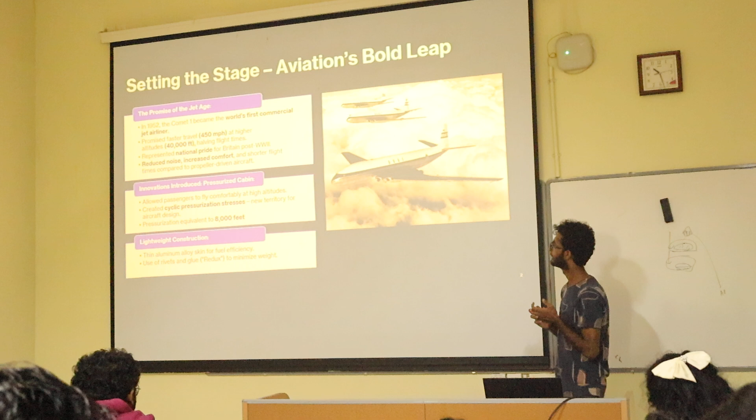So in 1952, the Comet 1 came into service. It was the first commercial jet airliner. It was promised to travel faster than previous aircraft at a height of 40,000 feet, avoiding messy weather and giving passengers a comfortable travel experience with less noise. Its design attracted passengers with a modern, sleek look.

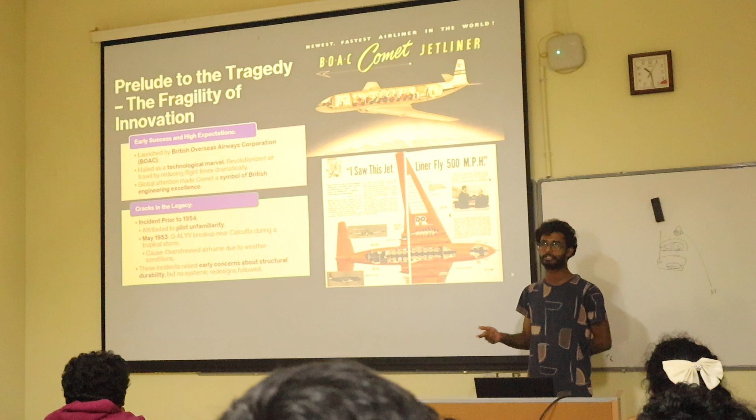Then in May 1953, another incident took place in Calcutta, which was due to weather conditions. This incident raised early concerns about the structure and durability of the aircraft.

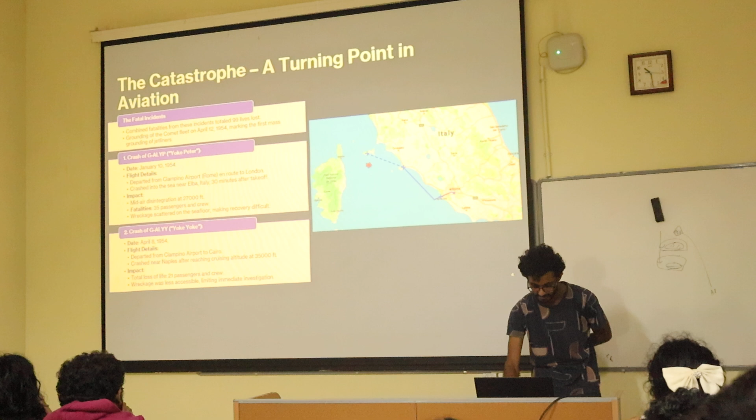Then another incident took place on January 10, 1954. The aircraft launched from Rome to London and crashed after 20 minutes of takeoff.

Then on April 8, 1954, another incident took place near the Mediterranean Sea at a height of 35,000 feet. All the incidents together resulted in a loss of 99 lives.

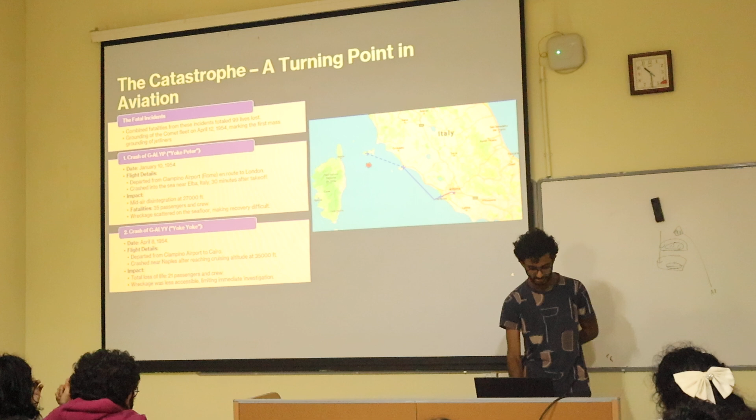These were the two incidents that people really cared about.

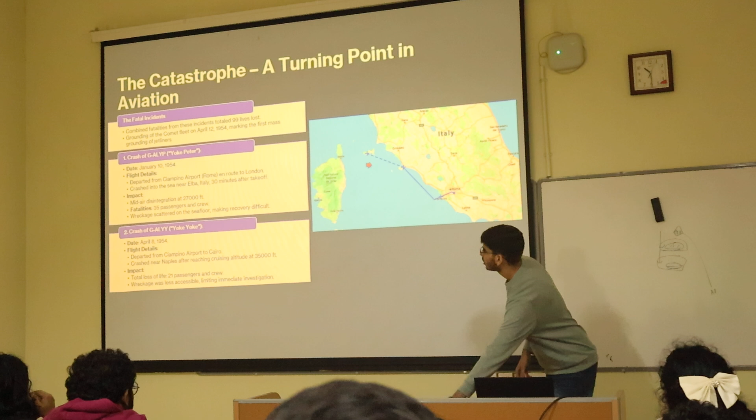There were many similarities between both incidents. After the first incident, the British government asked the Royal Aircraft Establishment to solve the mystery behind the crash. When they looked at the wreckage area after the crash, they found that it had spread over a very wide area.

This led to the conclusion that the plane had burst mid-air and had not crashed into the ocean intact. They concluded the plane must have burst mid-air, and they designed an experiment to test this.

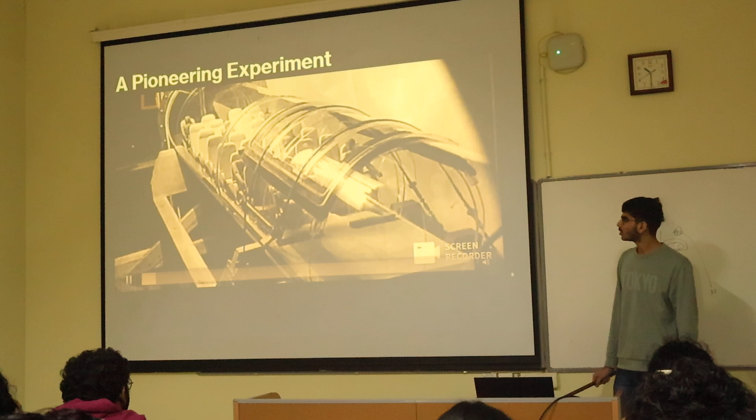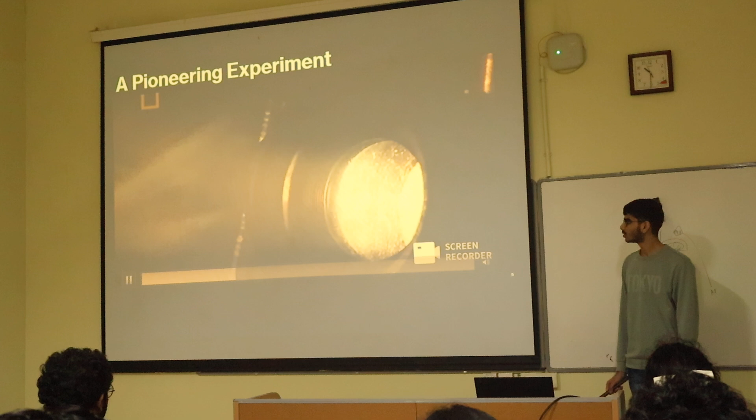The team built a perspex model of the fuselage, 1/10 the actual size. The cabin included 28 major seats. The model was housed inside a pressure chamber, where the pressure in the fuselage was increased to 8.25 pounds, equivalent to flying at 12,000 meters. The team then deliberately ruptured the model.

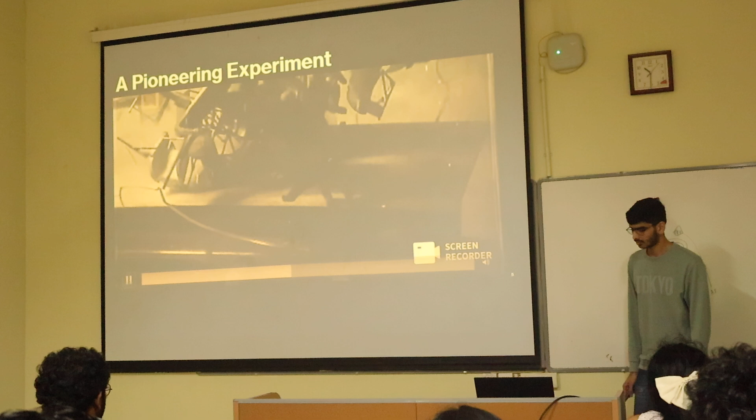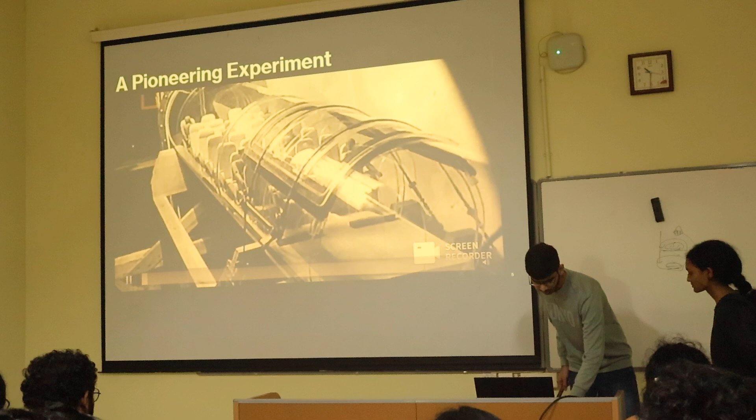The team built a perspex model of the fuselage, 1/10 the actual size. After testing, they found that the plane had exploded mid-air, and these were the conclusions they came to.

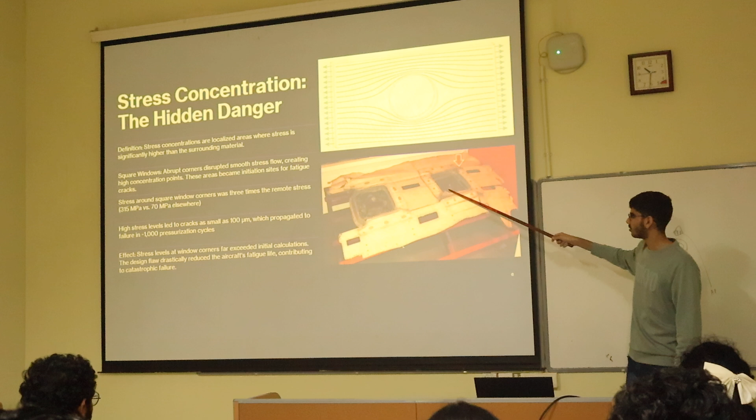The first fatal flaw was stress concentration. Because of the square windows in the de Havilland Comet aircraft, there was stress concentration around the cracks near the edges of the windows. If the windows were circular, the flow of stress would be quite uniform, but the square windows caused stress to concentrate, leading to more cracks and more fatigue.

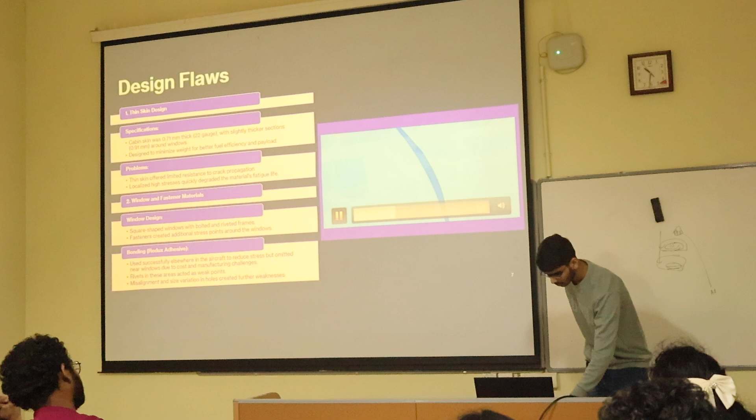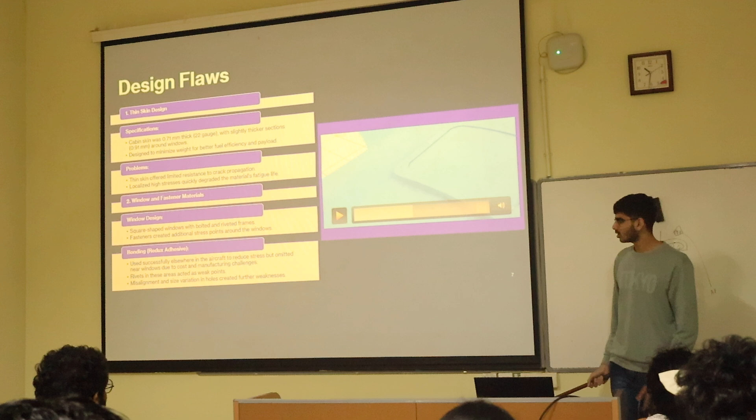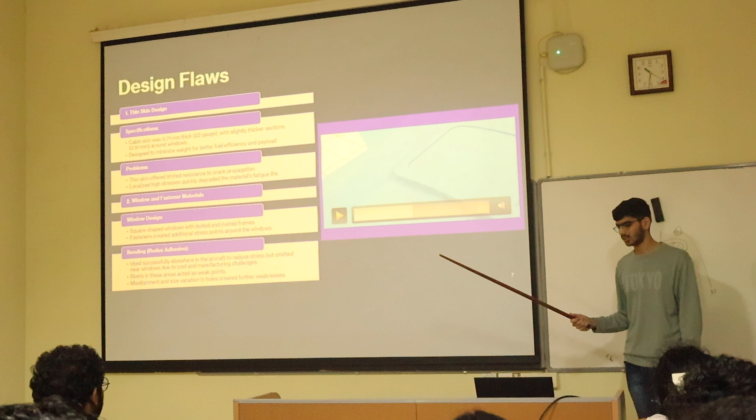There were some more design flaws in the aircraft. The first was the thin aluminum skin, only 0.7 millimeters thick, too thin to withstand the pressurization and depressurization cycles an aircraft undergoes. The other major flaw was the use of punched rivets, which caused micro cracks to develop in the aircraft skin. These became weak points for stress concentration, which eventually led to failure.

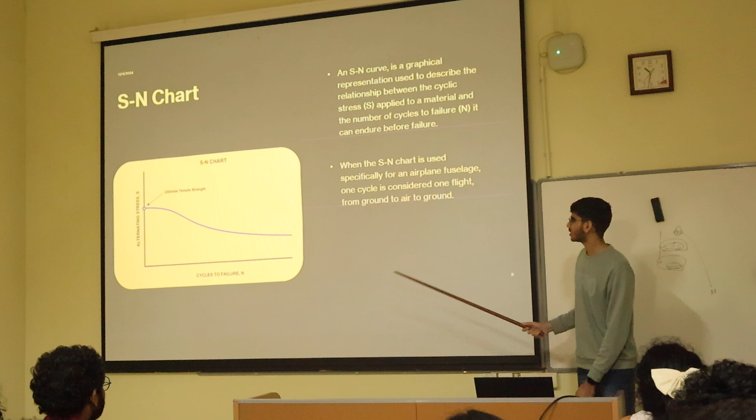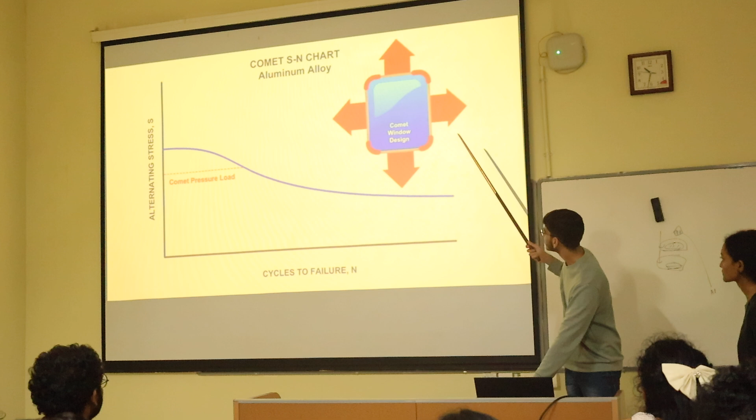This is a photo representing how the windows of the aircraft undergo pressurization and depressurization cycles.

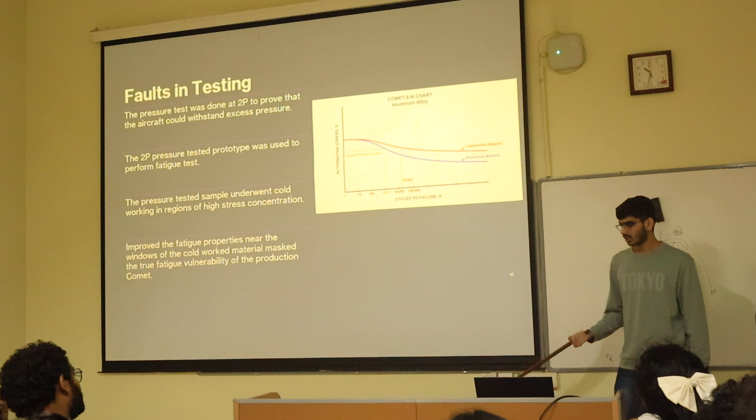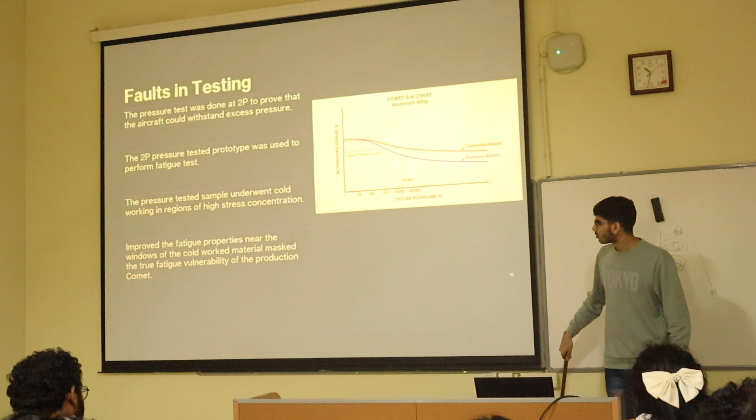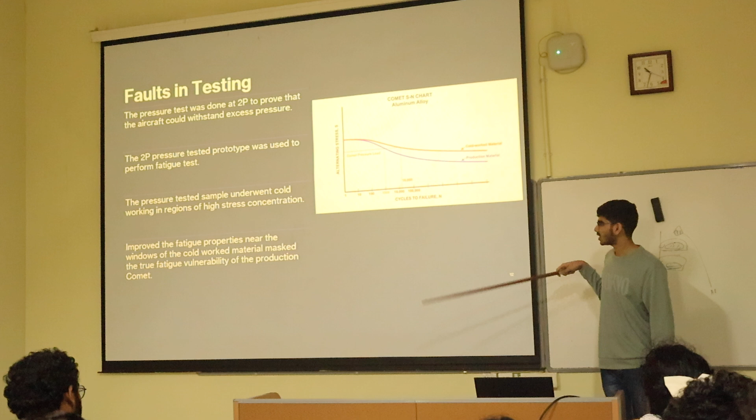There were also faults in testing. The main fault was that they tested the aircraft at twice the peak pressure, double the operational pressure. This caused the material to become cold worked. When you test material at twice the peak pressure, its characteristics fundamentally change, it becomes stronger but more brittle. So when they tested the material, they were actually testing cold-worked material around the windows and around the plane.

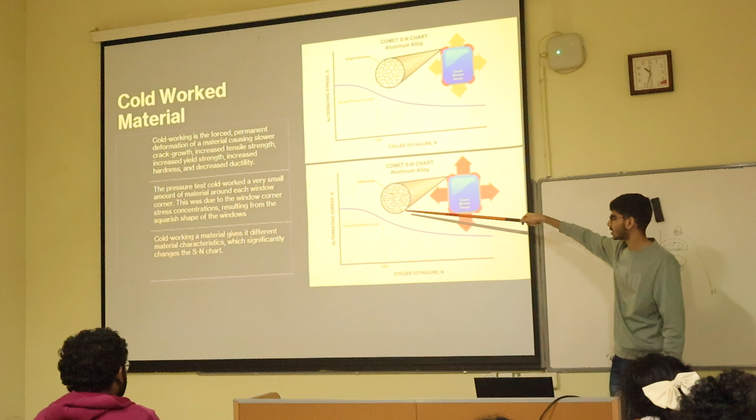This is how the material changes from its original structure to this structure after cold working, and this led to the material failure. After this, the failure was in fast fracture.

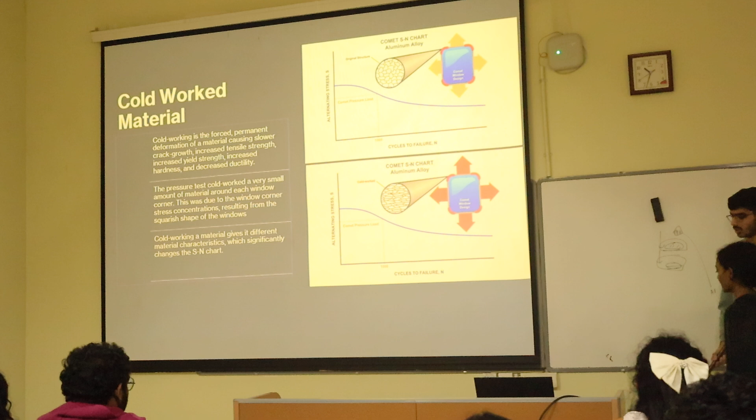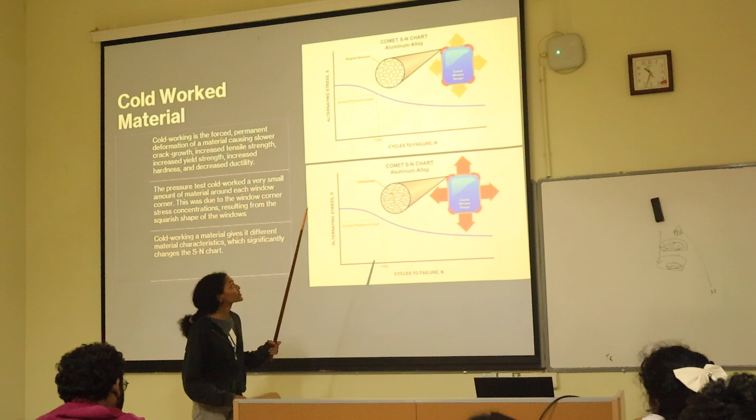Just to give some view of what Anish said: initially, there was a pressure test which was conducted at an excess pressure, 2P, just to be safe. When this was conducted at 2P, the material got cold worked, and in cold working this increases the tensile strength and yield strength at points of high stress concentration.

This is because at these points there are higher dislocations, so there will be pinning of dislocations. So when it was subjected to 2P pressure, it increased the stress concentration there, and the material around the corners, like here on all these corners, got cold worked and had high strength.

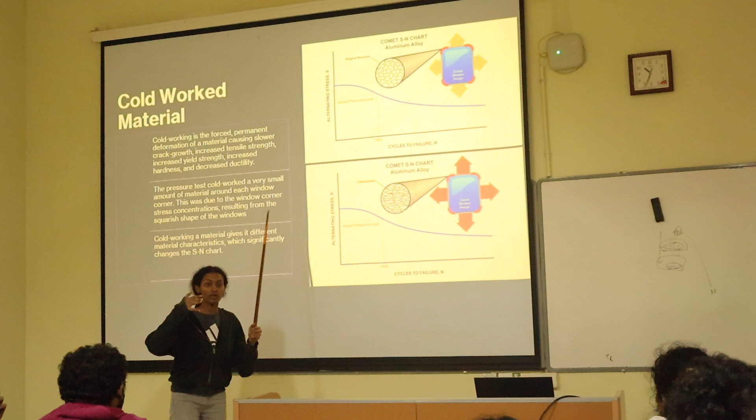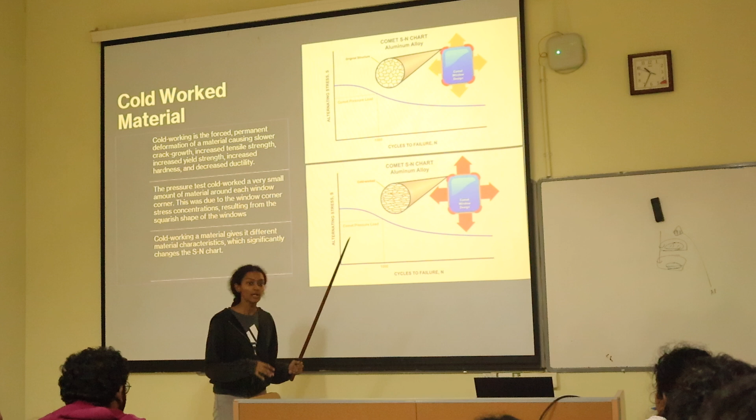So what was the mistake? The mistake was that they subjected the same sample to fatigue testing. When this fatigue test happened, the 2P pressure tested samples could take about 16,000 cycles. But actually, the real aircraft, when almost in the sky, can only take up to P pressure.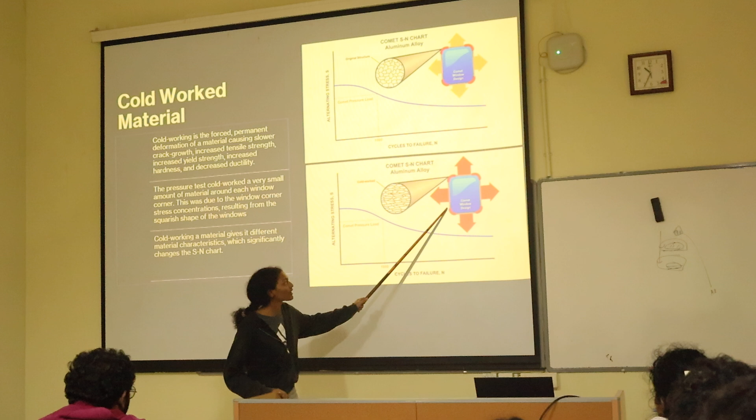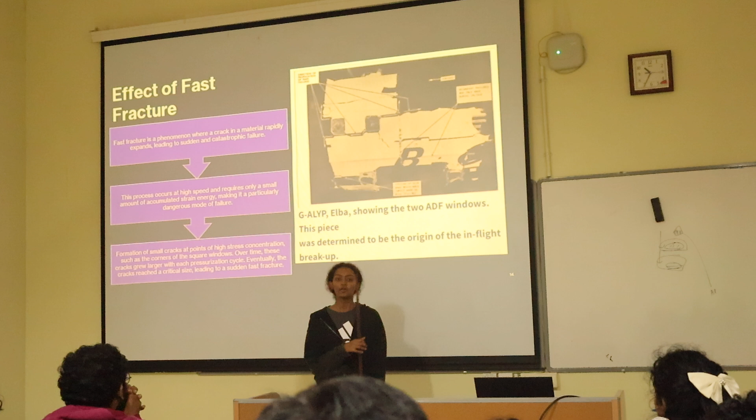So primarily, we can see that there are 3 main reasons why this fails: one, high stress concentration around the square windows, around the border, around the complex shape of the square windows; two, punch riveting.

In punch riveting, what happened was when we give a lot more load, punch riveting is used to bring two surfaces of the aircraft together, but this created micro cracks around it, and these were points of propagation for fatigue.

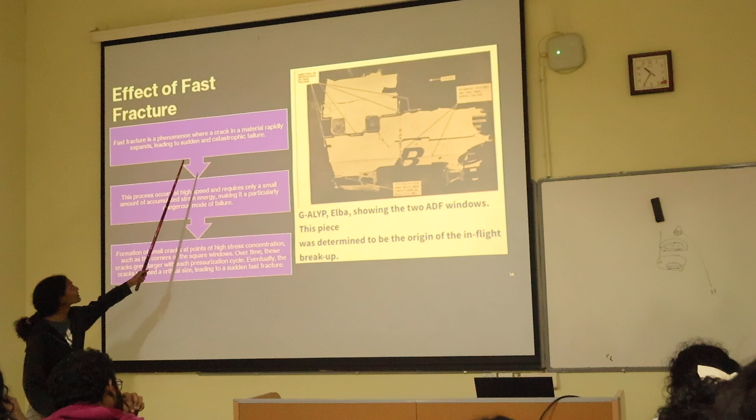And three was fast fracture. In these regions, fast fracture is a fast phenomenon, and it leads to catastrophic failure.

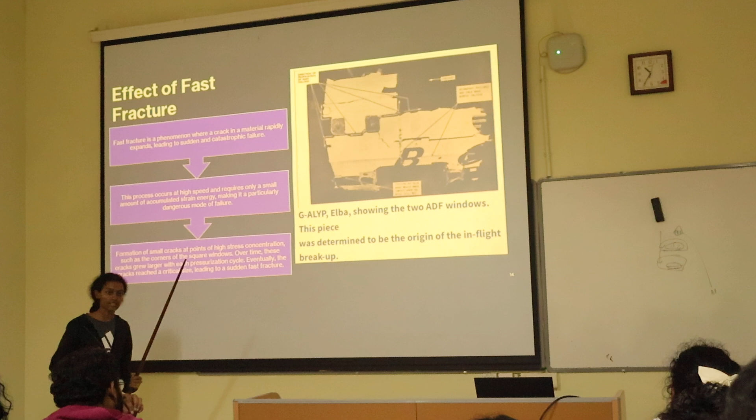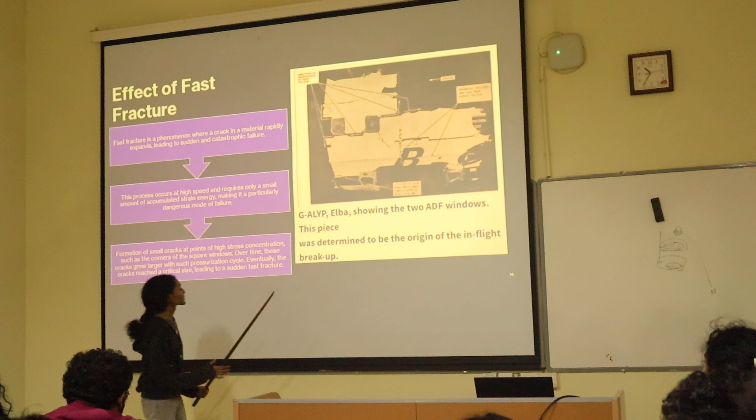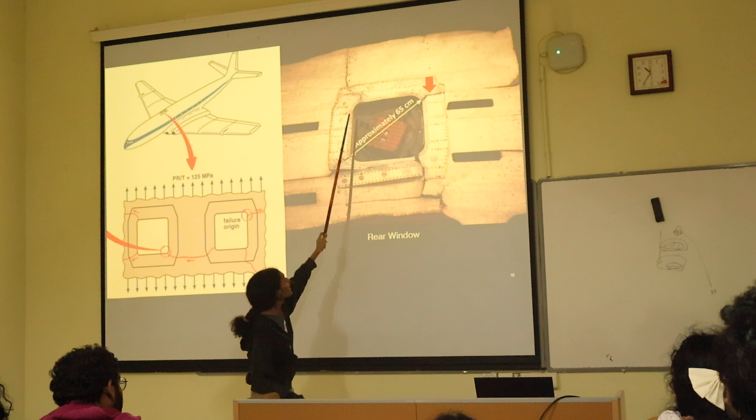Yes, this is actually debris from the comet. You can see that we find fracture around the corners here in both of these regions, and both of them are the same because, like I said, it's the corners.

Yeah, so the pressure tank testing: first, four comets failed, and after the first two, given the weather conditions, the last two had their license cancelled, and after that they did a pressure tank testing. In this testing, they had placed the fuselage in a water tank.

The reason it was placed in a water tank was that this reduced the amount of destruction, so we don't want an explosion to happen. To moderate that, this happened in a water tank, so there was water inside the aircraft and outside, and there were hydraulic rams which kept the pressure cycles and maintained the pressure.

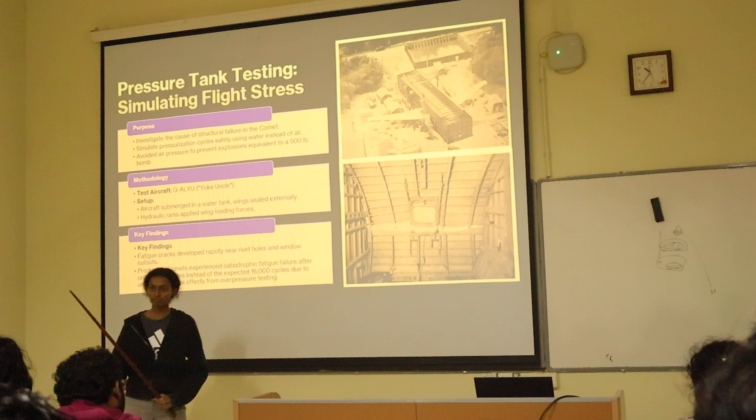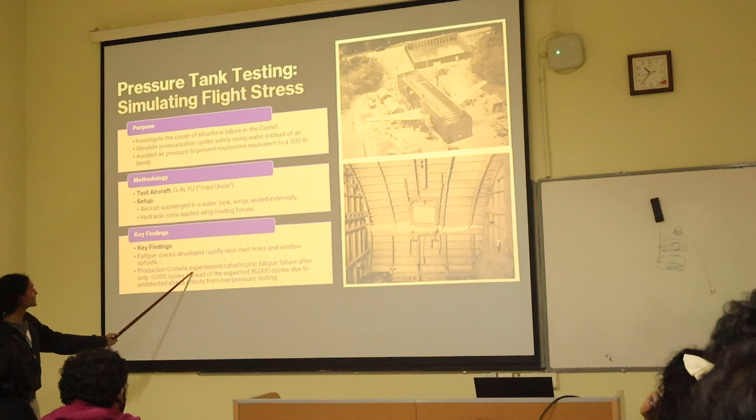And here they noticed that the cracks and all the fatigue cracks happened at points of high concentration. Because of that, from the expected 16,000 cycles, it went down to 1,000 cycles.

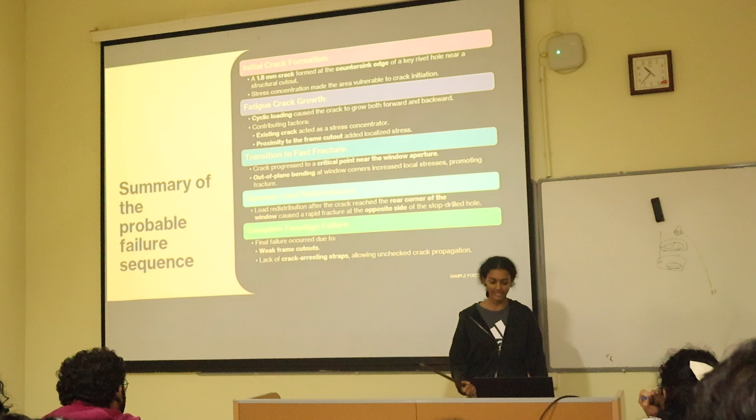Yeah, so this is a summary of all that we have. I'll just say everything. So initial crack - this is the flowchart. Initially there were crack formations occurred around the cutout edges, like the regions around the rivets.

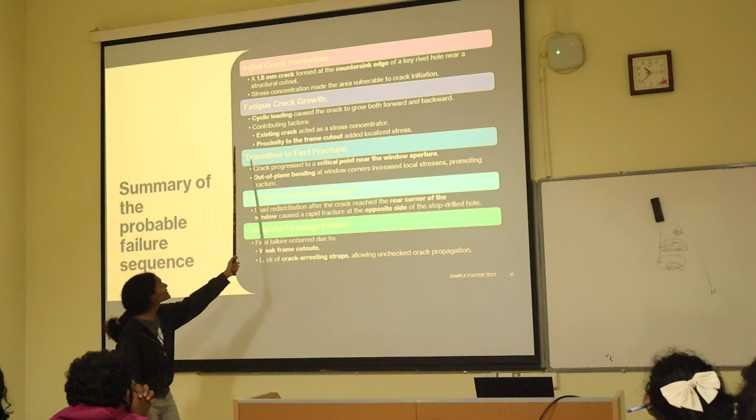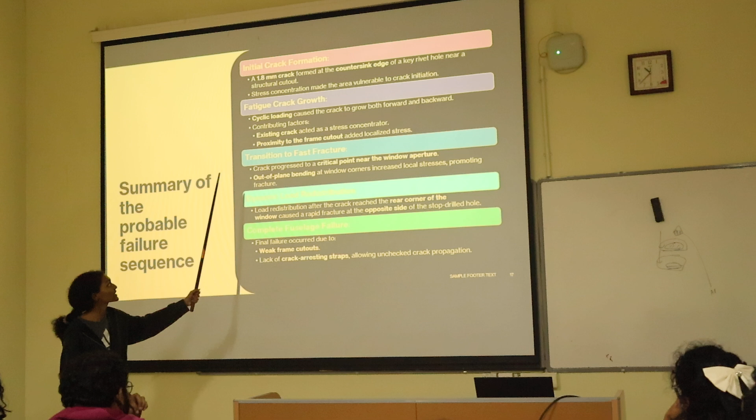This is due to repeated cycles, where each cycle accounts for one airplane operation - it includes one takeoff and one landing, that is one cycle. And then after fatigue, it transitions to fast fracture.

Fast fracture requires very low energy, but it happens catastrophically.

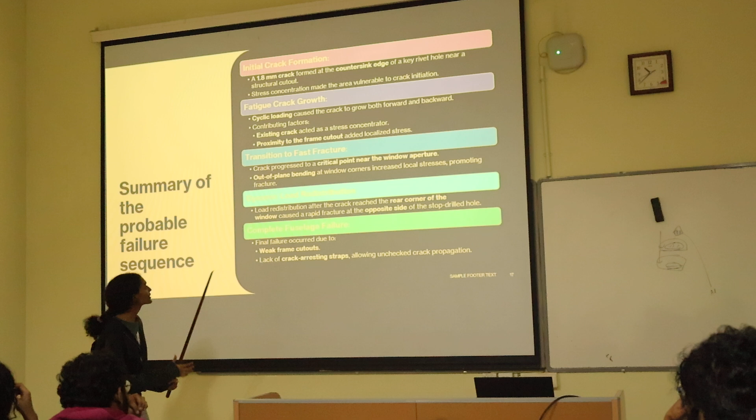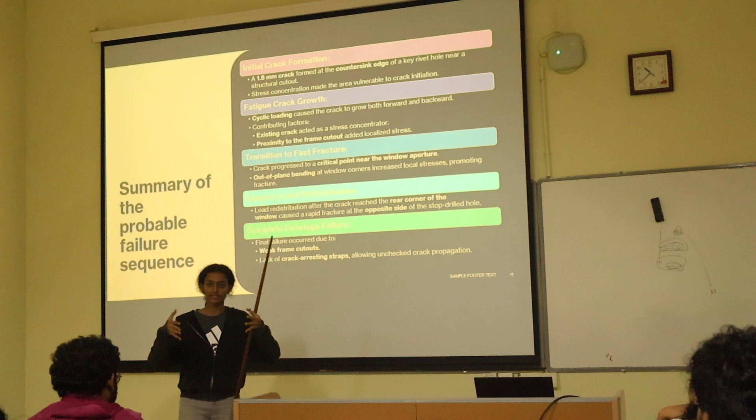Okay, so the frame cutouts which were present - frame cutouts are regions in the fuselage. Fuselage, by the way, is the cabin of a plane. So there were big frame cutouts around these regions - these are materials which are being cut out, probably to place some other parts.

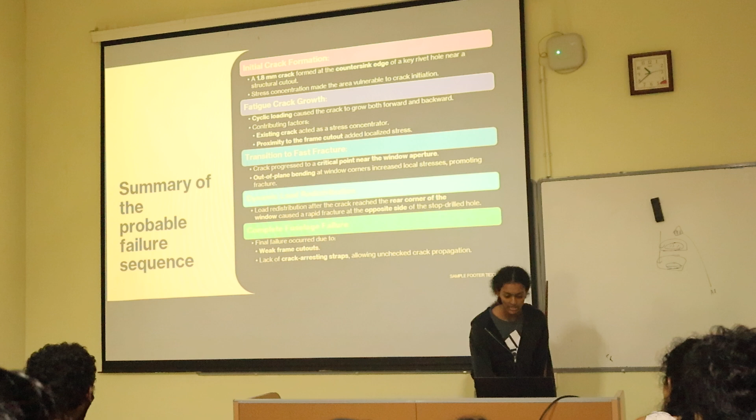Around these regions, there is high stress, and because of that the material properties change. So the lessons we learned from this comet accident are fatigue awareness - I think we've mentioned this multiple times already.

The square cutouts and design evolution - now, after realizing the issue with square windows, all planes now have an oval shape and windows which do not have sharp edges.

And improved testing. The major mistakes they made while testing were testing to peak pressure and using the same sample to test fatigue. I think now, in testing, they simulate what actually happens when an aircraft goes up and everything that happens to the aircraft.

Phase shift is an important method which they follow now. Until the comets, they were only doing safe-life testing. Now they started fail-safe design. Fail-safe involves including other components which are not even necessary for the aircraft to run or take off, but are required in case of failure or fracture. These make support systems which prevent failure. And we have stricter policies now. Just to give a summary, this is the timeline of what actually happened.

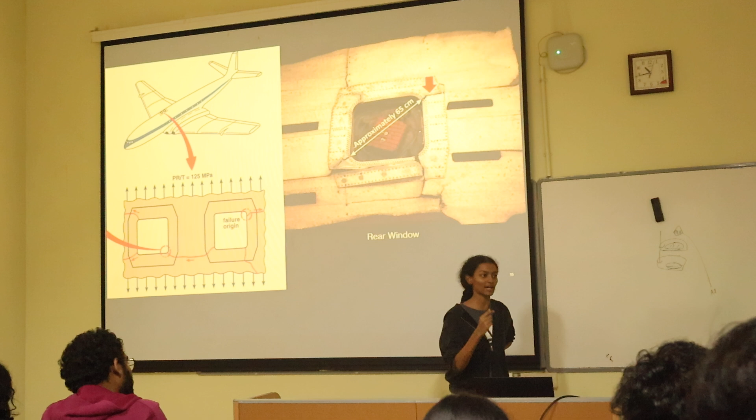Maya asked: you explained something like the transition to fast fracture took place, right? So how exactly do you conclude that it was fast fracture? Because in this slide, fatigue is basically a slower phenomenon. Once a crack starts propagating, it's faster. As you can see, this is quite a long fracture, so this cannot have been fatigue — even if it had been a fatigue phenomenon, they would have noticed it long back. But this happens over time; the cracks propagate slowly, and when a crack becomes critical, after that it expands very rapidly. So until that point, during inspection, the cracks are really too small to detect. But during mid-air flights, they expand so rapidly that the entire aircraft fails.

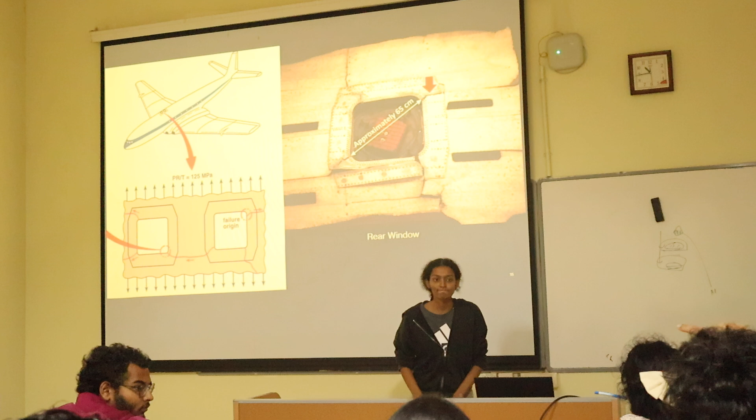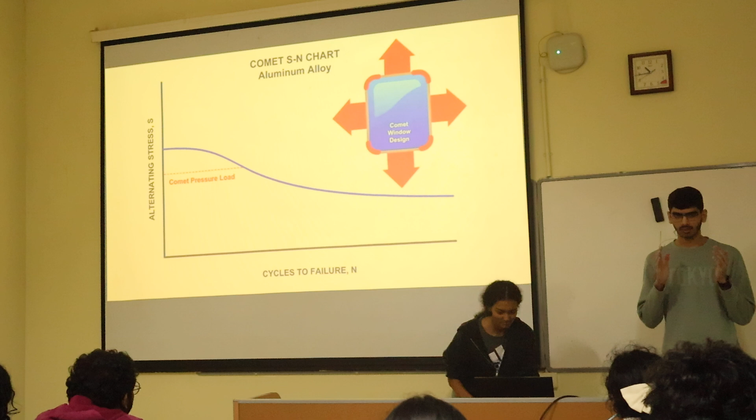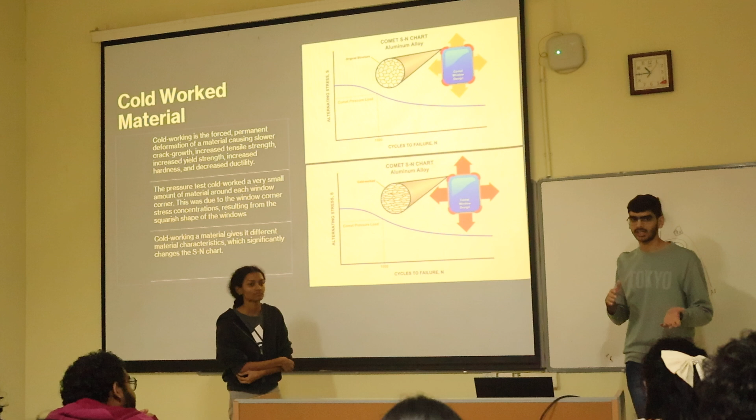You said that on over-pressing, what will happen? So the operating pressure inside the rig is, let's say, P. Just to be safe, they tested the material at 2P. When you test the material at 2P, the fundamental characteristics, the fundamental phase or transform phase of the material changes. So the material transitions from one structure to another at 2P. So basically what they were testing was this new structure, and this structure's strength and UTS is higher. That's why the fatigue line they estimated was much higher than the actual fatigue line of the production aircraft — because of pressure, the structure changed. So this is the S-N of the cold-worked material, this is the production material. That's why all the estimation costs were off.

Okay, Sanjana, you mentioned something about safe life and then failure is not fail-safe. Can somebody else answer? Can you direct the question to somebody specific?

In general, can people address their questions to somebody specific in the group, not to the group broadly? Who are you addressing it to?

Yeah, okay, Mohana. So safe life is the amount of time for a component, like it's sort of like an expiry. It's the amount of time a component can work safely and still be useful.

Whereas fail-safe, I already mentioned, is more like a phenomenon, because in fail-safe they use something called redundancy, which I mentioned before. This is where they use components which are not necessary for the working of the flight, but just to take care of the safety. So in case there's a fracture, there's another mechanism through which the aircraft still remains safe.

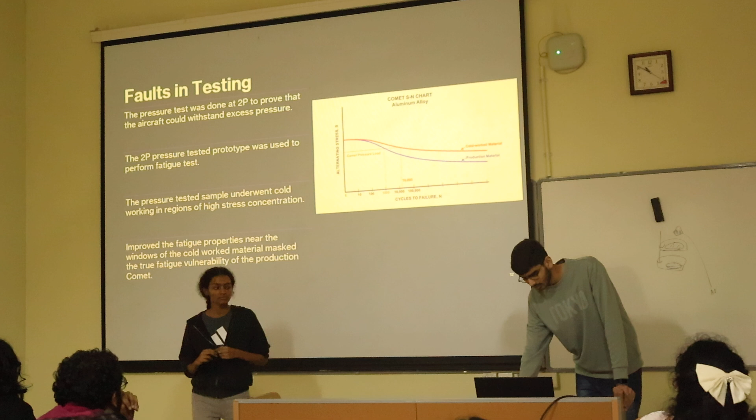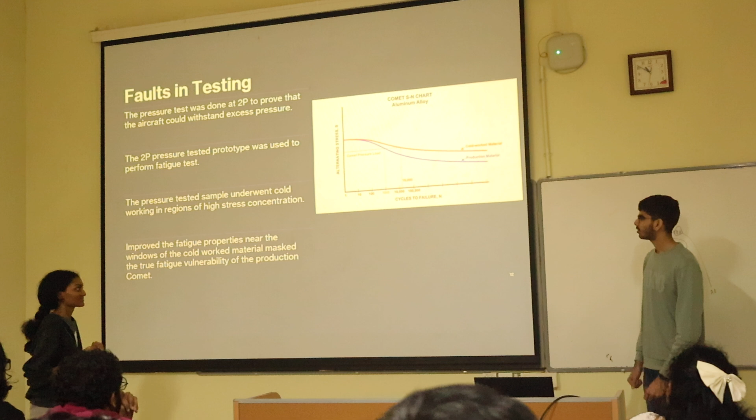What you saw here, would that qualify as low cycle fatigue or high cycle fatigue? And that would qualify as low cycle fatigue. The number of cycles that we did were approximately a few thousand cycles.

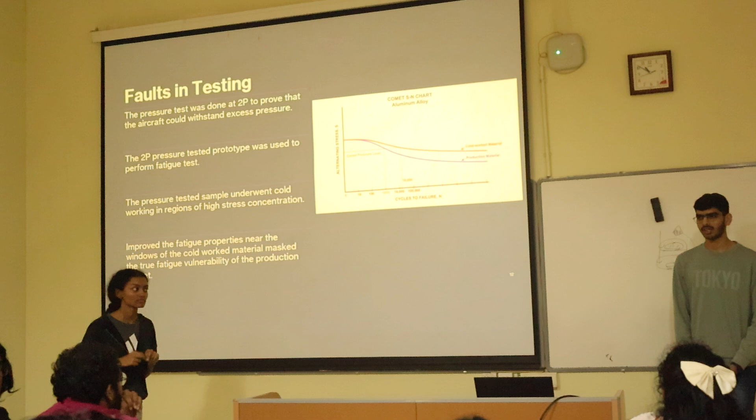2000 cycles, huh? Okay. When they pressure-tested the material using the tank, it failed after 3057 cycles. Okay, 3000 is not low cycle but close to low cycle.

Fine. If you want to make a material better for low cycle fatigue, what property would you try to make better? If I want to change things from the material point of view, what would you do to make it more resistant to low cycle fatigue?

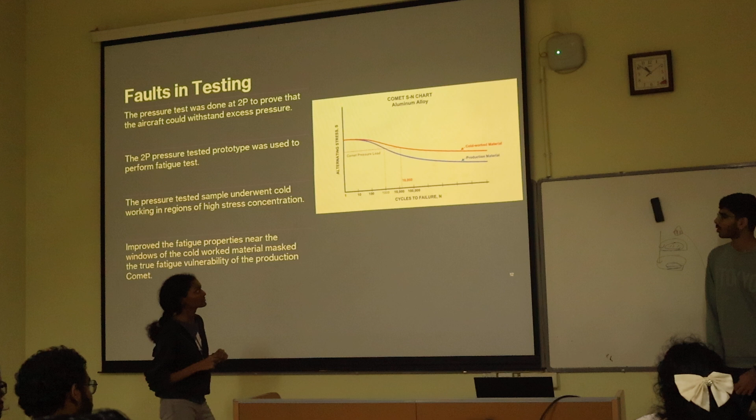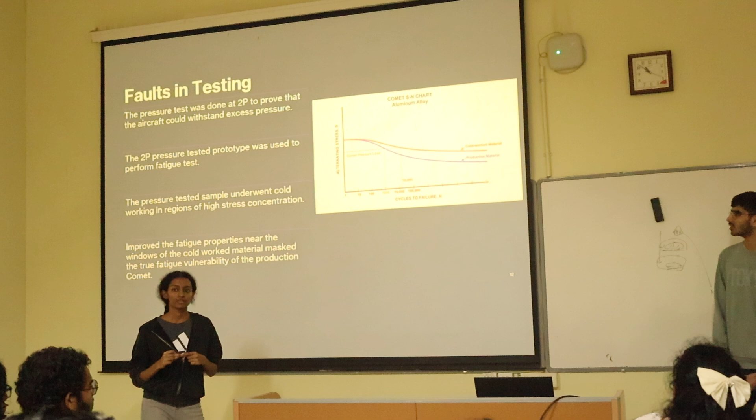So we could probably perform some heat treatments or thermomechanical treatments for the material, or choose a material that inherently has a high UTS. High UTS? No. And the point at the left end of the curve is UTS, so for lower cycles it will be high UTS.

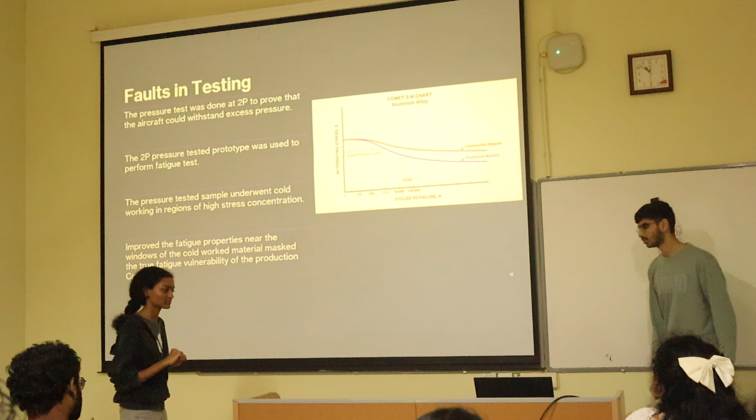Fine, let's thank the speakers again. The next presentation is the Columbia Space Shuttle.